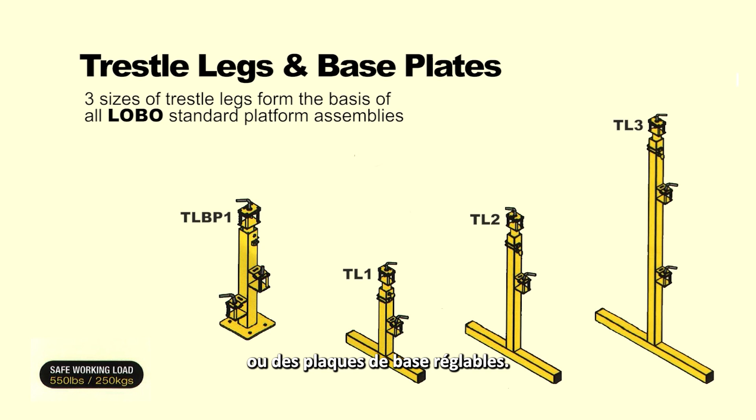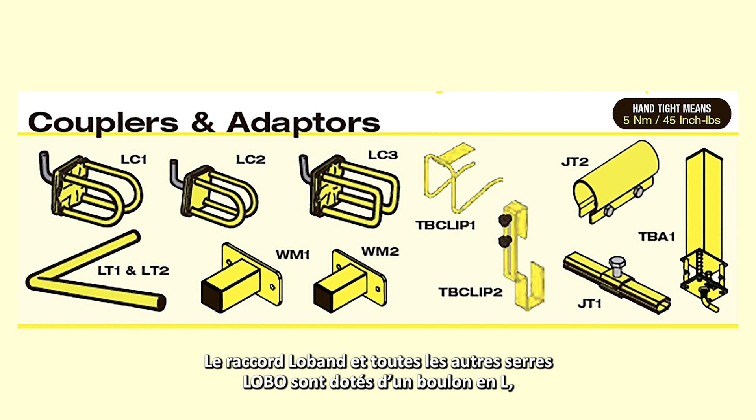The LOBO system is built on 3 different sized trestle legs or adjustable base plates. Trestle legs incorporating side clamps and top clamps together with round steel tube and Loband couplers form the basic elements of the system. The Loband coupler and all other LOBO clamps feature an L bolt which must always be tight. The 3 sizes of trestle legs and the adjustable base plate connect together to form a modular and scalable access platform system.

Remove the height adjustment pin and raise the insert of the LOBO trestle legs. Always remember to reinsert the pin and tighten the thumb screw. The welded side clamps are set at predefined positions and all line up to allow total integration of all LOBO systems trestle legs, base plates and round tube.

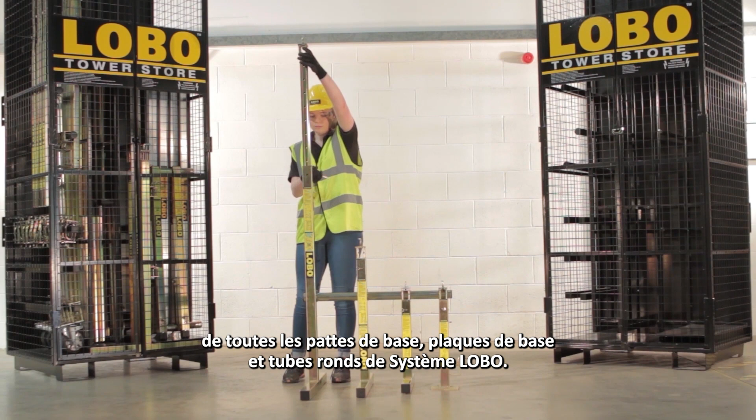To build any structure by using a trestle leg or base plate, take a length of LOBO round tube and insert it into the lower side clamp and tighten. Always start at the lower side clamp. Take the second leg and repeat the procedure, ensuring you use the lower side clamp first to allow the round tube to square up to the leg. Wherever there are adjacent side clamps, add more round tube to form the next load-bearing level.

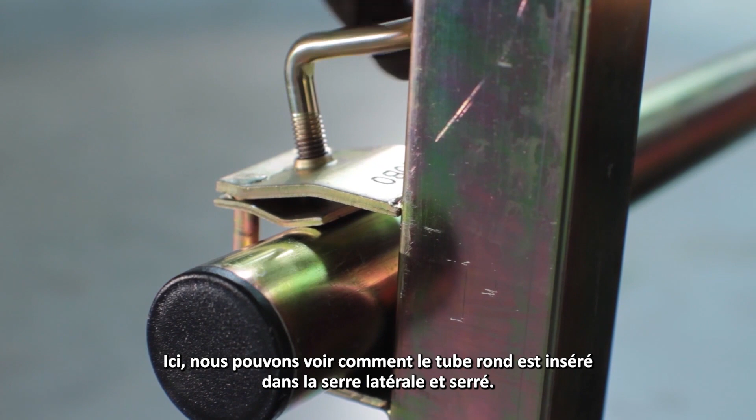These 3 tubes form the load-bearing levels on the system as they are all supported by a welded side or top clamp. The round tube can be raised to provide handrails as required by removing the height adjustment pin. Always fully reinsert the pin and tighten the thumb screw. Here we can see how the round tube is inserted into the side clamp and tightened.

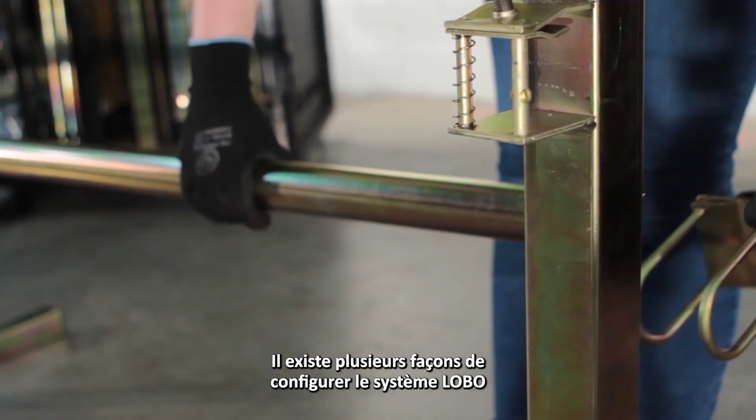It is possible to build a level platform on uneven surfaces, plinths, steps or slopes by using the Loband coupler. There are a number of ways the LOBO system can be configured over a step or on a slope. For example, using the Loband coupler, which is not load bearing, set the round tube height to provide a level round tube as shown. Fully tighten the Loband coupler and ensure the trestle legs are vertical. Never use the Loband for load-bearing purposes. For example, in this case, only the tube at the top is load-bearing as it sits inside a top clamp.

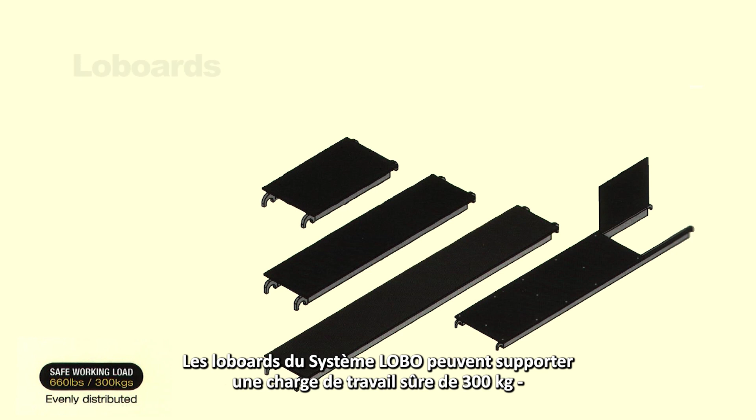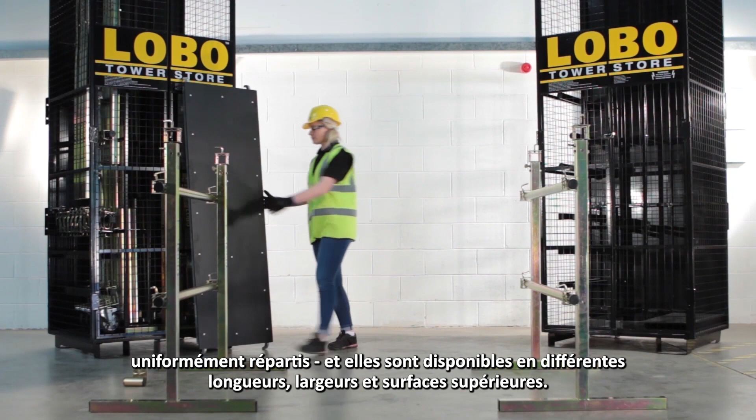LOBO Systems Loboards are all rated at 300 kg safe working load, uniformly distributed, and they come in a variety of lengths, widths and top surfaces. A hatchway door option is also available. Here we repeat the initial assembly process and use more trestle legs to produce a second trestle configuration. Any Loboard size can be used to suit the requirement.

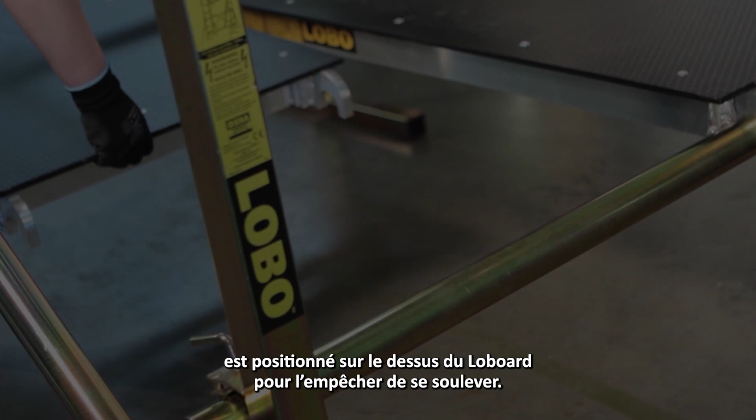The Loboard, when fitted in place, should be locked in position by a small piece of round tube called a T01 and a Loband coupler. Ensure the Loband is tight and the L bolt is positioned on top of the Loboard to stop it from lifting up. Loboards can be configured side by side, end to end, or at right angles. Loboards are designed to fit end to end, enabling a raised walkway or ramp to be constructed. As they interlock, Loboards cannot be lifted individually.

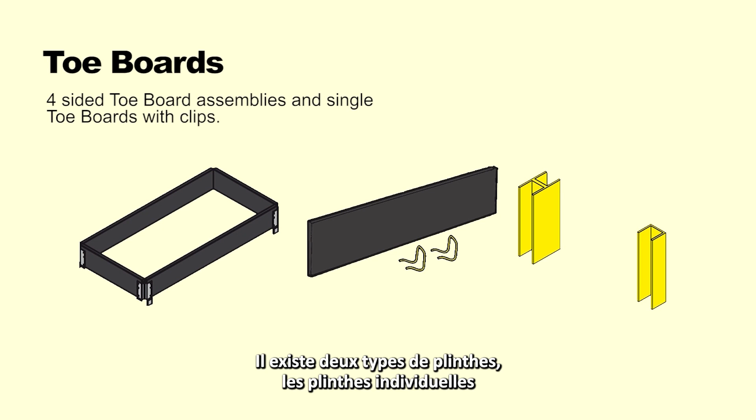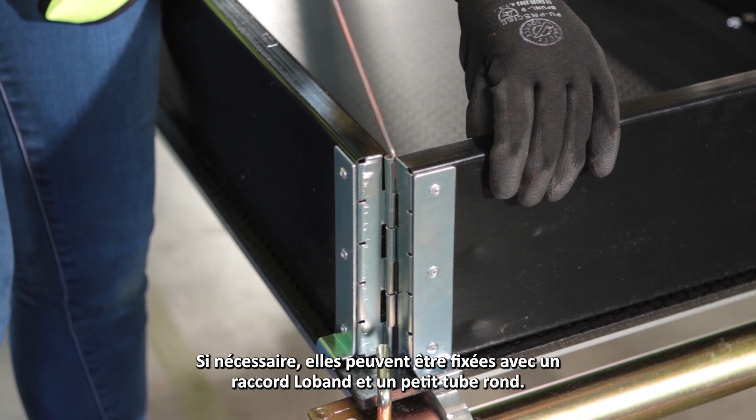Toe boards. There are two types of toe boards: individual toe board pieces, which are fitted with toe board clips and joiners to form corners, and hinges which wrap around the edge of the Loboard. These are fitted by opening them out over the Loboard perimeter. They can be fixed down with a Loband coupler and a small round tube if required.

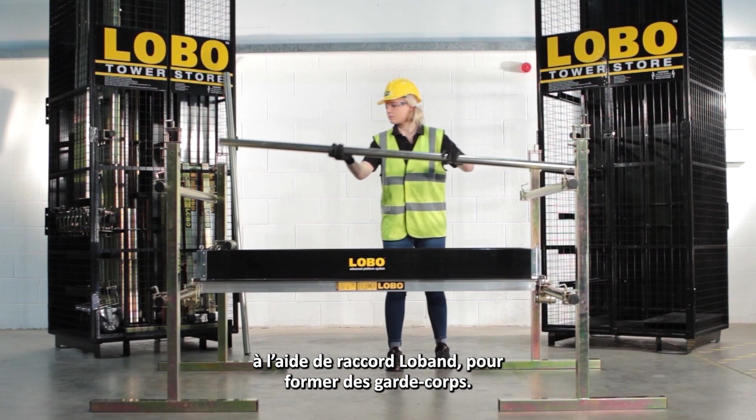Handrail round tubes. Round tubes should be fitted at every standing height using Loband couplers to form handrails. Tubes should, wherever possible, be fitted on top of the load-bearing tube and secured with Loband couplers. This means the tube can then be load-bearing. The tube can be positioned exactly where needed and the Lobands tightened to secure in place.

The gap between the Loboard, or the top of the toe board if fitted, and the intermediate handrail round tube should be no more than 470 mm. The gap between the intermediate handrail and the top handrail should be no more than 470 mm, with the top handrail tube set at 1 metre from the Loboard.

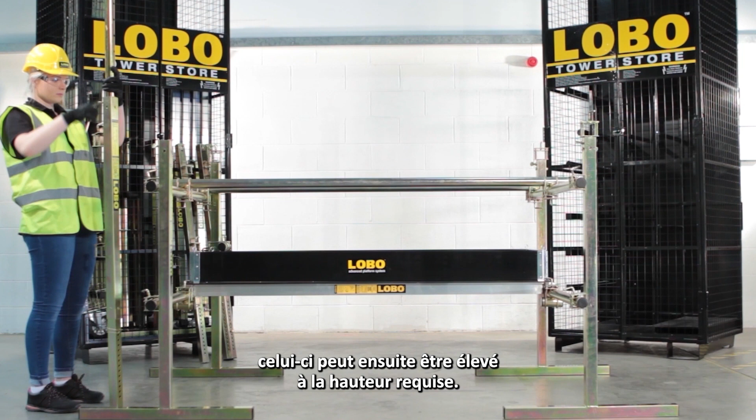Adjustable extensions. To increase the system height, remove the telescopic insert and insert an adjustable extension. This can then be raised to the required height. Reinsert the pin and tighten the thumb screw to remove any movement. Adjustable extensions can be fitted to any trestle leg or base plate by removing the inserts and reinserting it into the top of the adjustable extension.

The adjustable extension can be positioned back into the leg or base plate to the correct height by inserting the pin and tightening the thumb screw. Each time an extension is inserted into a leg or base plate, the height will increase by 1 metre. Always add cross tubes where there are adjacent clamps.

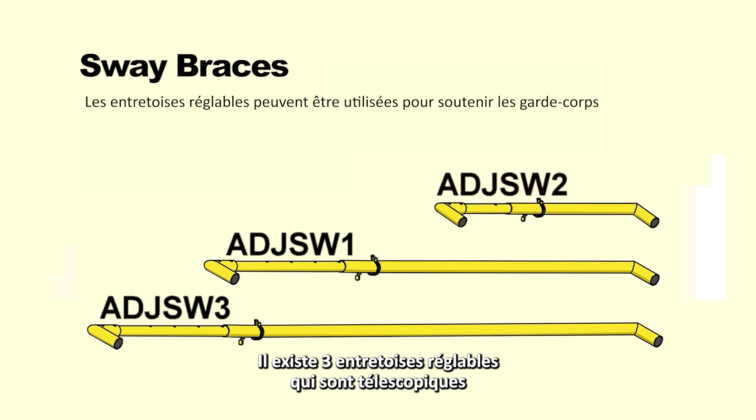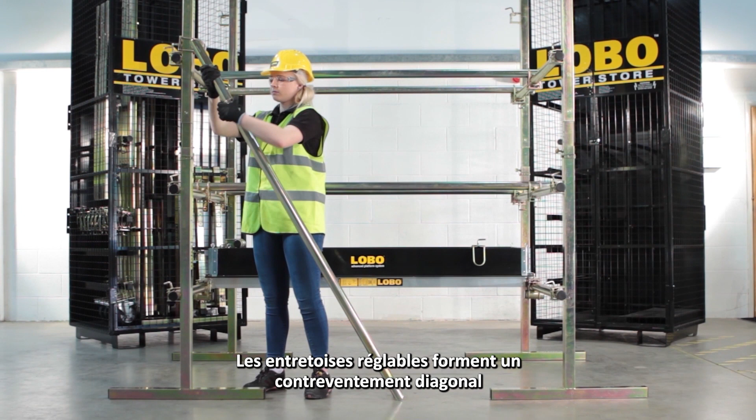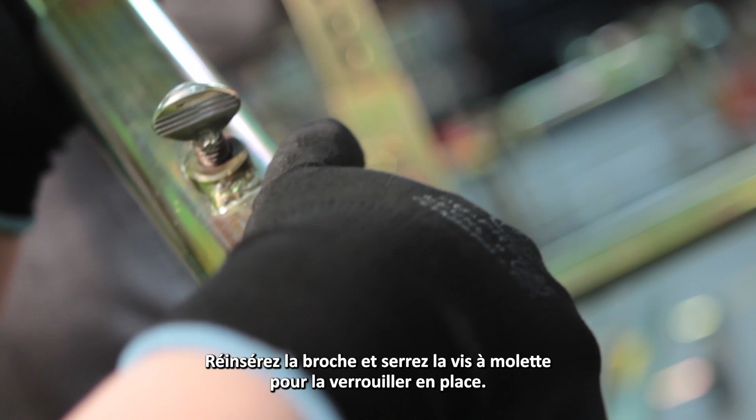Adjustable sway braces. There are 3 adjustable sway braces which are telescopic and so can be fitted anywhere on the system to remove unwanted movement. Adjustable sway braces form diagonal bracing across any LOBO platform and can be fitted to round or square tube. Select the correct length from a choice of 3, depending on the size of Loboard in use, and adjust the telescopic sway brace length to fit. Reinsert the pin and tighten the thumb screw to lock in place. Use Loband couplers to secure the sway brace. The sway brace can be moved to the optimum position.

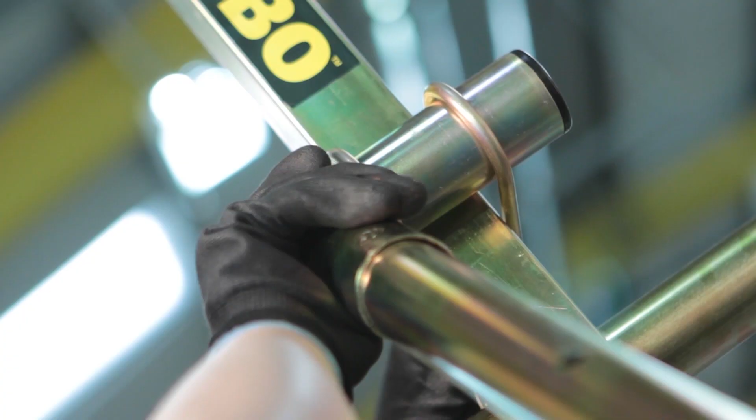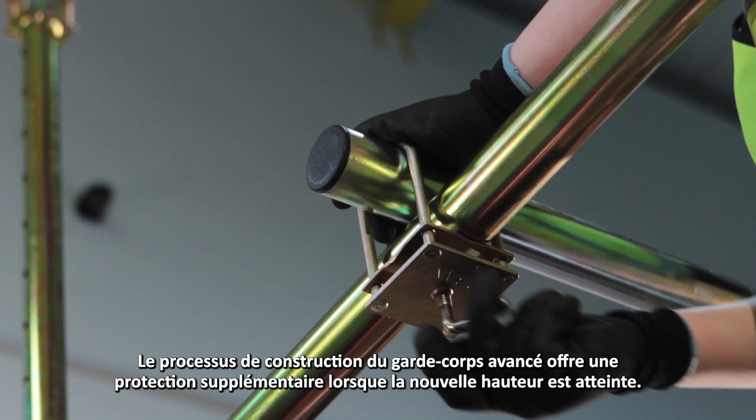Handrails can be fitted above the current working height to ensure safety when an elevated height is being constructed. The advanced handrail construction process provides additional protection when the new height is reached. Always ensure the Loband L bolt is tight and position tube on top of a load-bearing tube whenever possible.

Ladders. Ladders can be secured to round tube anywhere on the system using LOBO ladder clamps. Always use at least 2 and ensure the L bolts are tight.

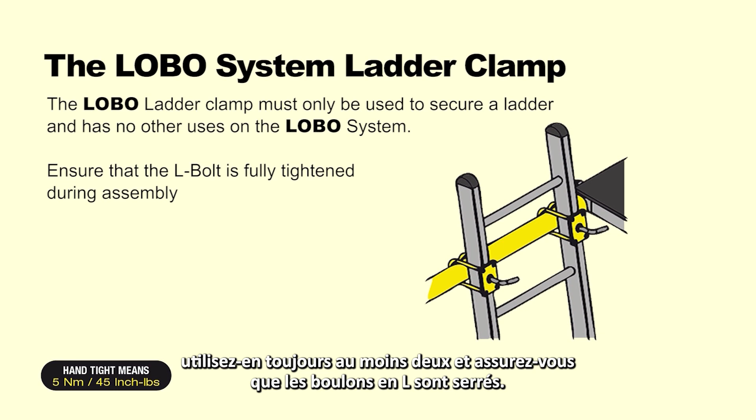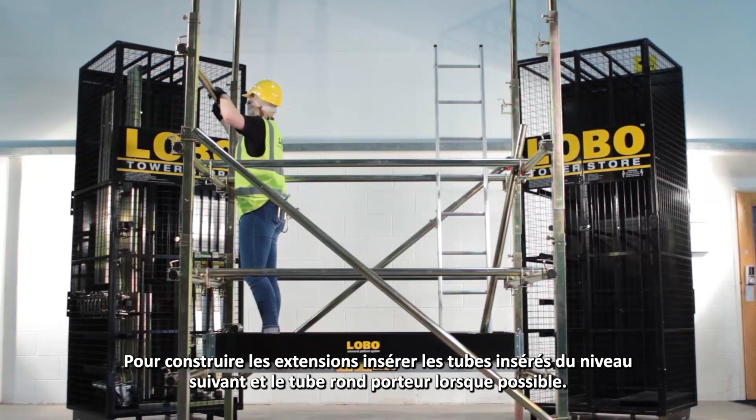LOBO Advanced Handrail System. The LOBO system allows handrails to be fitted above working height from a lower position of safety so that the trained user should never be exposed to the risk of a fall. To construct the next level, insert extensions and tube accordingly.

Ladders come in a variety of lengths and can be fitted from a position of safety using 2 LOBO ladder clamps at the top of the ladder. If the ladder needs to be vertical, 2 more clamps can be used to secure the bottom. Always ensure the ladder clamps and side clamps are tight and secure.

Outriggers are used to increase the platform footprint of a structure, thus ensuring it always complies with the 3:1 height to base ratio rule. Outriggers should always be used to provide stability to taller systems and should be fitted all around a structure. 2 Lobands are required to fit each outrigger.

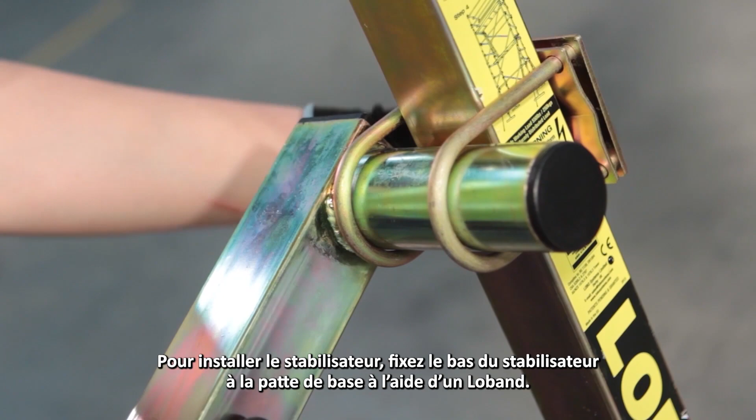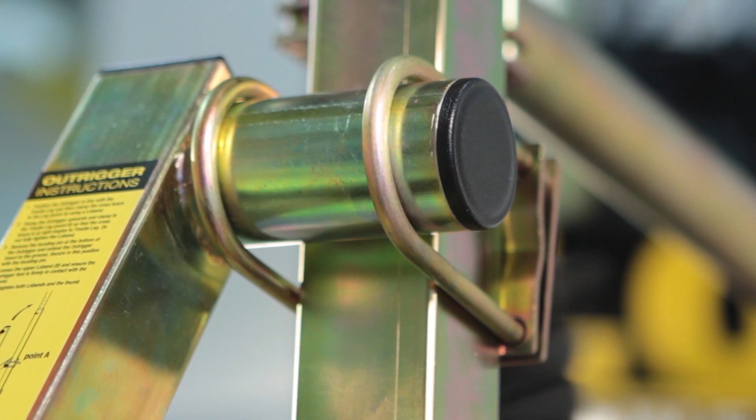To fit the outrigger, secure the bottom of the outrigger to the leg using a Loband. Secure the top to the leg with another Loband. Remove the pin to drop the outrigger rubber foot to the floor and reinsert the pin and tighten the thumb screw. Loosen the Lobands to adjust down on the floor, then tighten to secure.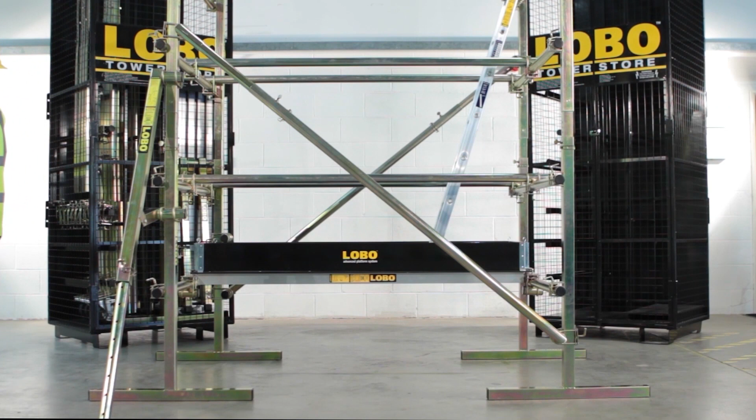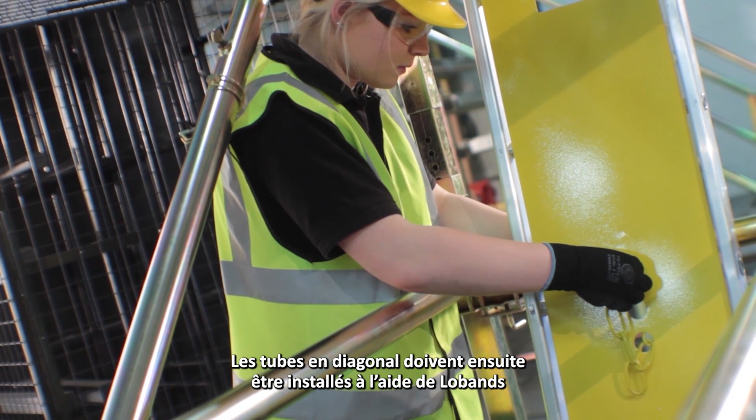Ladder guards. The LOBO ladder guard comes complete with a padlock and is secured from behind using the chain. When using LOBO boards with hatchways, require the ladder to be on the outside of the tube. Cross tubing should then be fitted using LOBO bands to complete the handrail enclosure around the LOBO board from a position of safety. LOBO boards can be fitted to the next level and adjustable extensions form handrail verticals.

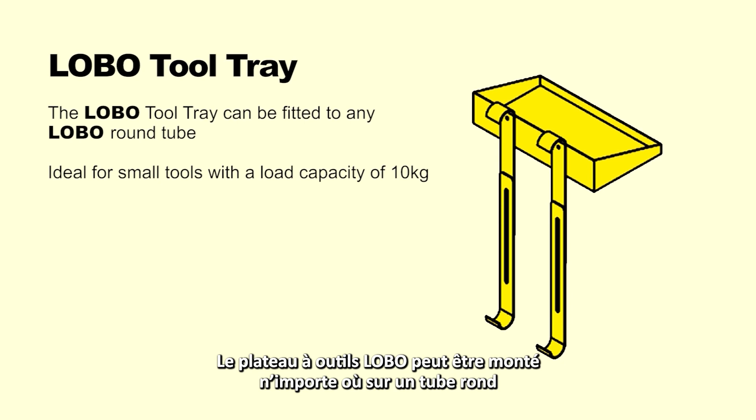Tool tray. The LOBO tool tray can be fitted anywhere on round tube to provide a convenient shelf when working on the platform. The brackets are designed to adjust to ensure a secure fit.

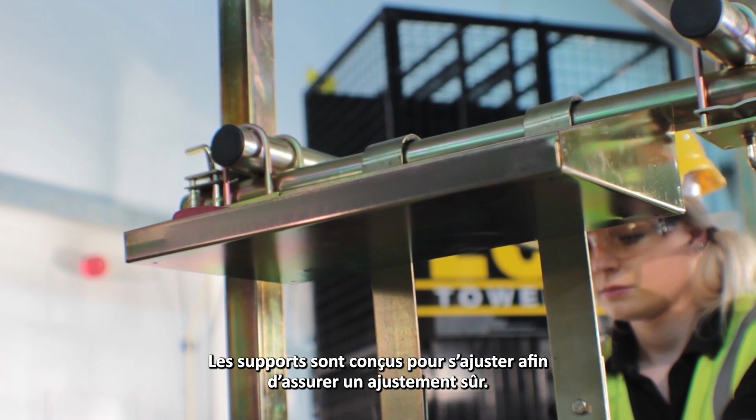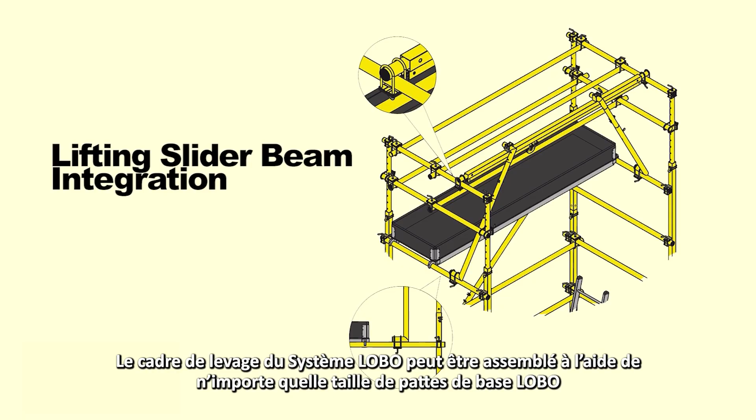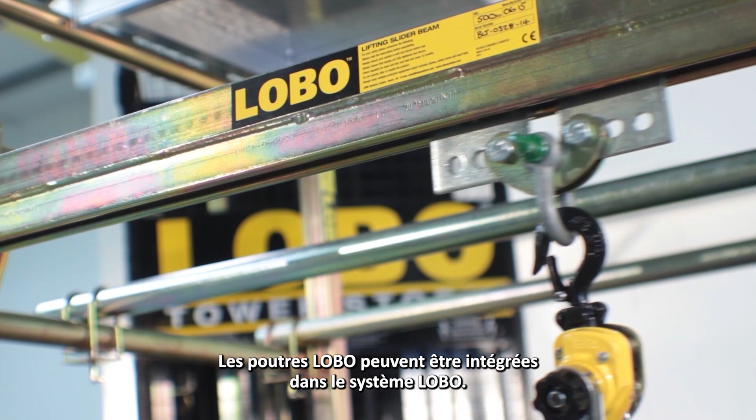Lifting slider beam. The LOBO system's lifting frame can be assembled using any size of LOBO trestle legs and adjustable sway braces. LOBO beams can be integrated into the LOBO system. There are 5 different lengths to correspond with 5 LOBO board lengths. Insert the lifting slider beam into the top clamps and raise to the required height using the adjustable sway braces, fitting using LOBO bands to ensure the system is rigid.

Outriggers and extensions can also be used to stabilise and increase the lifting height of the frame. Load calculations and stability assessments must be performed each time the beam is used. This ensures overloading and instability does not occur.

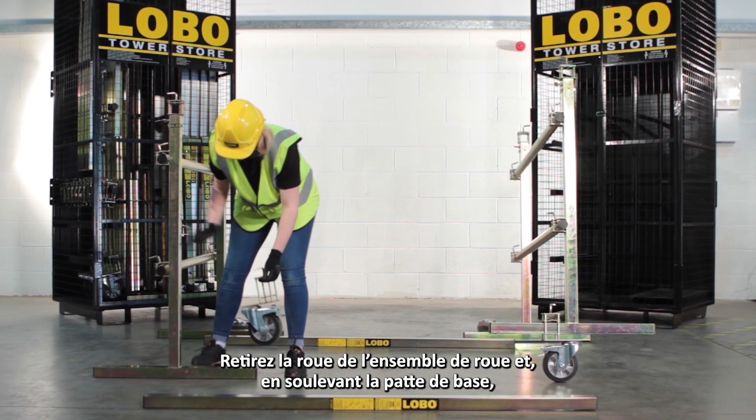Wheel kits. Wheel kits are available for systems on trestle legs and base plates and come in different sizes to correspond with the LOBO board length. Remove the wheel from the wheel kit and by lifting the trestle leg, insert it onto the foot of the trestle. Repeat to place an additional wheel on the same side on the opposite trestle.

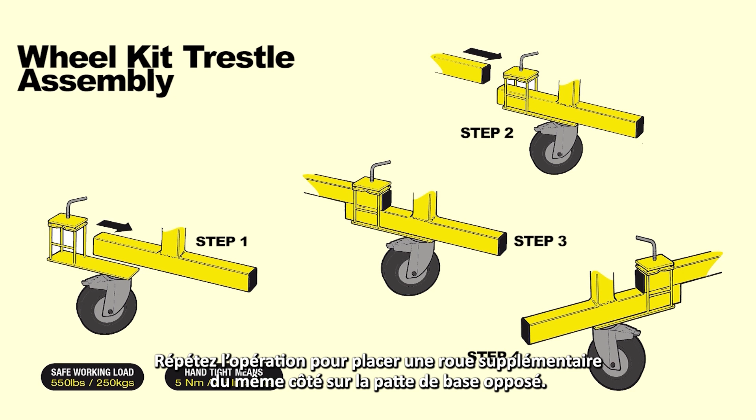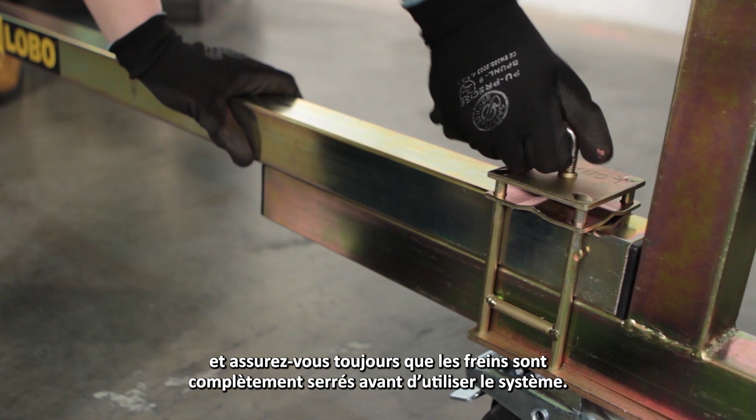Take the connecting square tube and insert it into one of the wheel top clamps to secure the wheel in place. Tighten the L-bolt. Repeat the procedure for the 2 legs on the other side. Fully tighten all L-bolts once the LOBO board has been refitted and always ensure the brakes are fully applied before using the system. If the system has been built square and straight, the LOBO board should slide easily around the tubes.

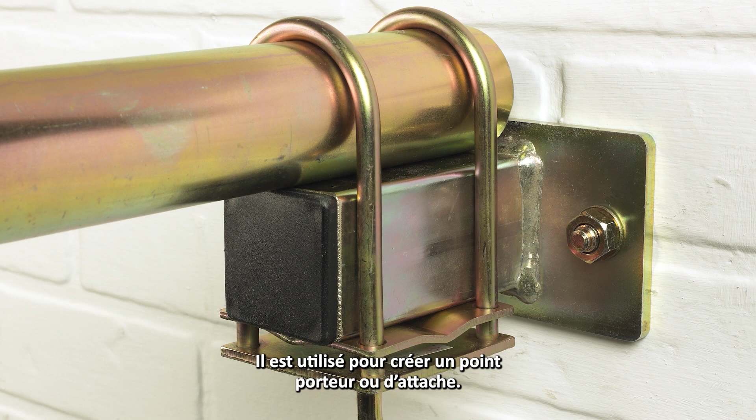LOBO gate. The LOBO gate is fitted using 3 LOBO band couplers, 2 to form hinges and the third to form a stop position on the opposite side to the hinges. Wall mount. WM1 is for tubes. They are used to create a load bearing or tie-off point. It needs to be suitably secured to a structure and should be fitted to bear the appropriate loading.

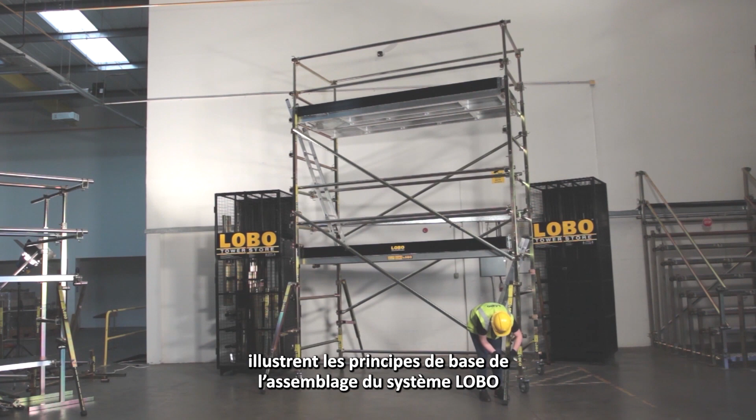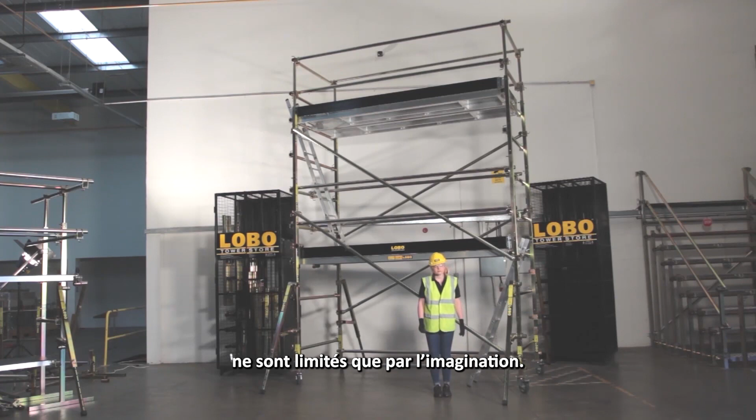The information provided in this short film illustrates the basic principles of how to assemble the LOBO system and identifies some of its more popular components. The configurations that can be built and the potential of the system is limited only by the imagination. For your own safety, please always remember the following points.

1. Anyone building or using the LOBO system should undertake the LOBO course and be trained and certified by an authorised LOBO trainer. 2. Always read the instructions before assembling and using the LOBO system and consult the system catalogue if necessary. 3. Always ensure the system is safe and secure before using it. 4. Always ensure that all clamps are fully tightened and secure before use. 5. Pack away all component parts properly after use.